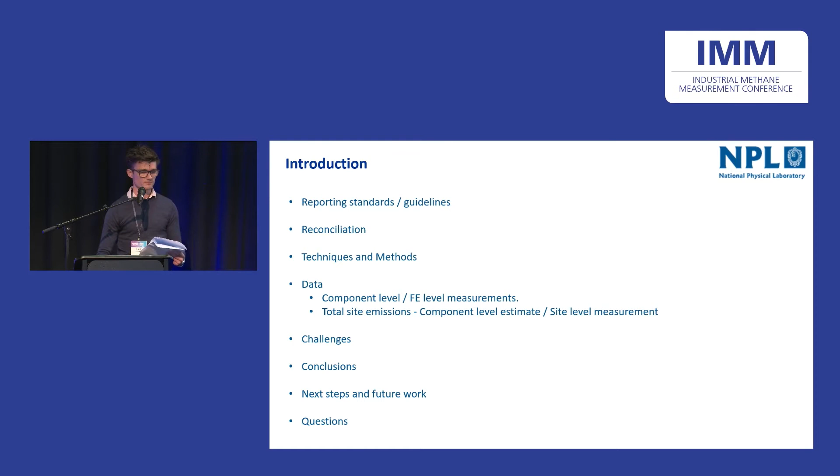So what do we have by way of methane emission reporting guidelines? Broadly speaking, there are two categories: the IPCC's tiers, and OGMP 2's levels. They're not really cross-comparable, but generally as you go up the tiers or levels, the requirements get more stringent, with most companies reporting around level 2 or 3 of the OGMP scale, with the goal being everyone reaching level 5, where actual measurements are required at both the source and site level.

So reconciliation: we're trying to take one data set and make it consistent with another, specifically for OGMP level 5. We're trying to reconcile estimates of site emissions made with source level measurements against site level quantification. The aim here is to provide confidence in these estimates by validating them against total site level quantification measurements.

A couple of important things to note: this type of reconciliation is a check of data at the time, not necessarily of the annualized emissions. So we take a snapshot quantification measurement at the site level, and check that data against what the estimate would be at that time, not the annualized emissions. Also, these measurements should be made independently of each other - we shouldn't have reliance on component level estimates for the site level and vice versa.

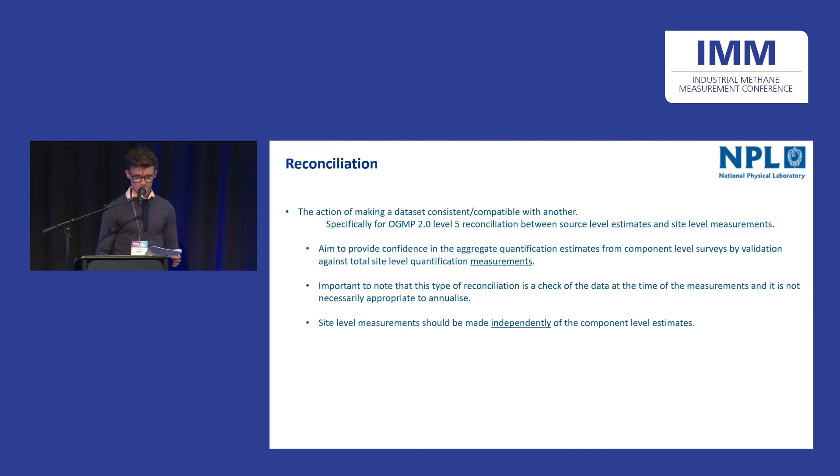So let's take a step back and talk about techniques and methods. Here I think it's important to go into how we make measurements, the features of a measurement. We've got sensors - the most fundamental part of a measurement, something that responds in the presence of a target. Many sensors are available.

The next level down, we've got the technique. This is the application of the sensor into an instrument, maybe combined with other things like optics or other sensors, more than one sensor. Again, many techniques are available: optical gas imaging, LiDAR, sniffing - some examples. They may employ the same sensors, or they may be different.

And then we move on to the deployment media, so the mode by which this is put into the field. It could be fixed on a pole, could be on a vehicle, could be a drone. And then the combination of all these features is the methodology.

And the methodology then also includes how we make the measurement. So a protocol, other measurements that are needed. For example, if you need some wind measurements to get a flux, any quality control procedures that are in place, all of these things are the methodology.

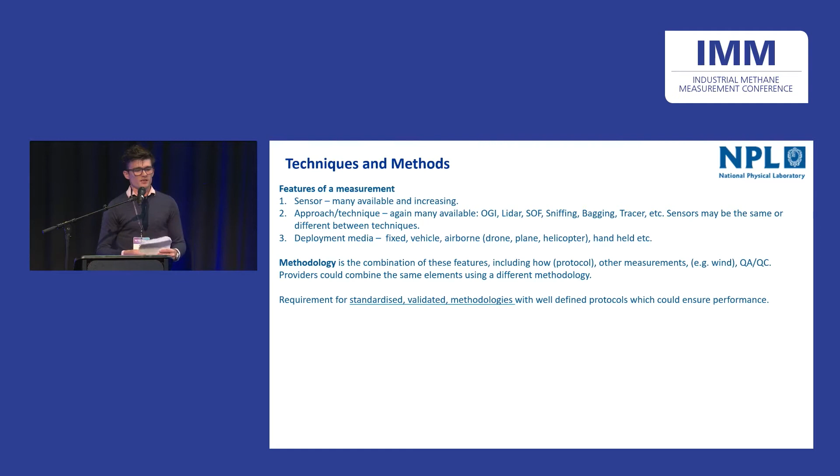And so you could have the same sensor approach and deployment media, but done in a different way, and we've got a different methodology. And so there's a requirement for these methodologies to be standardized, so that everyone's doing them in the same way and to ensure performance, and then to be validated.

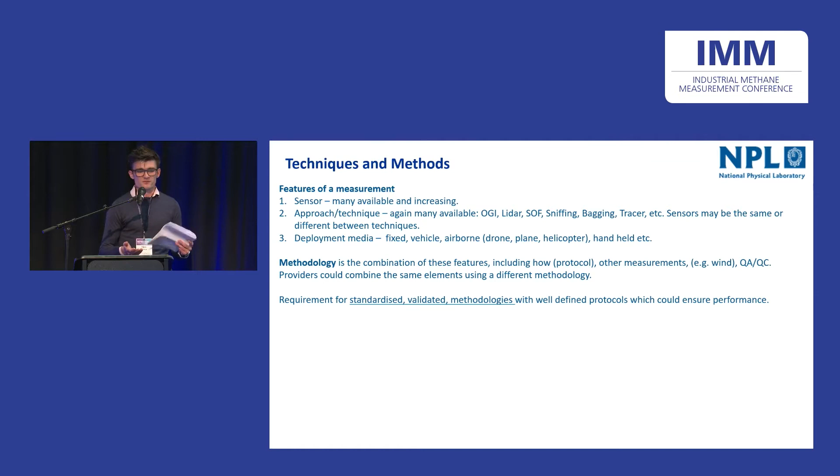To be proven to give accurate results. And this is where it's important to say that it's the methodology that is validated, not any one of these features of the measurement. So we're not validating the sensor, or the technique, we're validating the whole method, including how and other things that go into that.

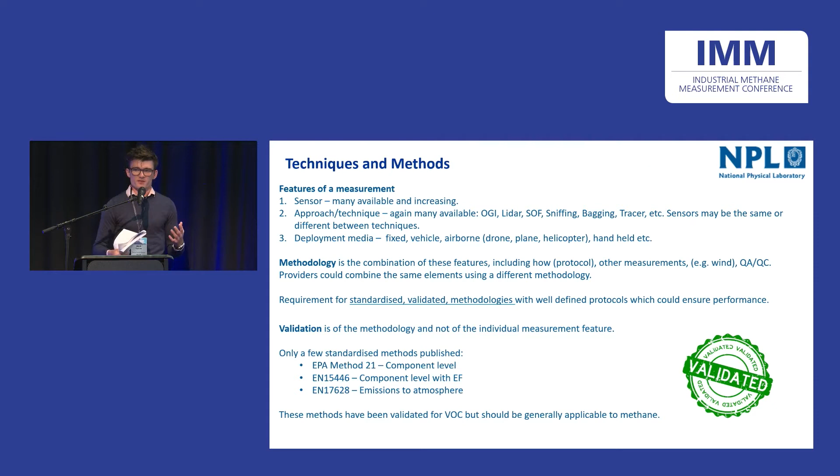And we don't have a lot of published standardized methods available to us. We have Method 21, US standard for component level detection, but it doesn't include any quantification in that method. EN 15446, again a similar detection level method with some emission factors included to estimate quantification, and a recently published standard, EN 17628, which is a validated method for total emissions to atmosphere.

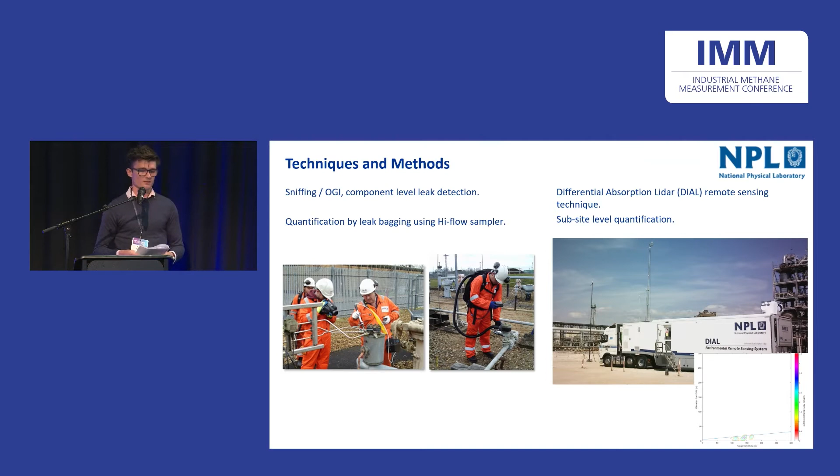This is a thing NPL has its own method for, but no independently validated method is available for that technique. And then on the right hand side, we've got our differential absorption LiDAR, a remote sensing site level technique for quantifying total emissions to atmosphere.

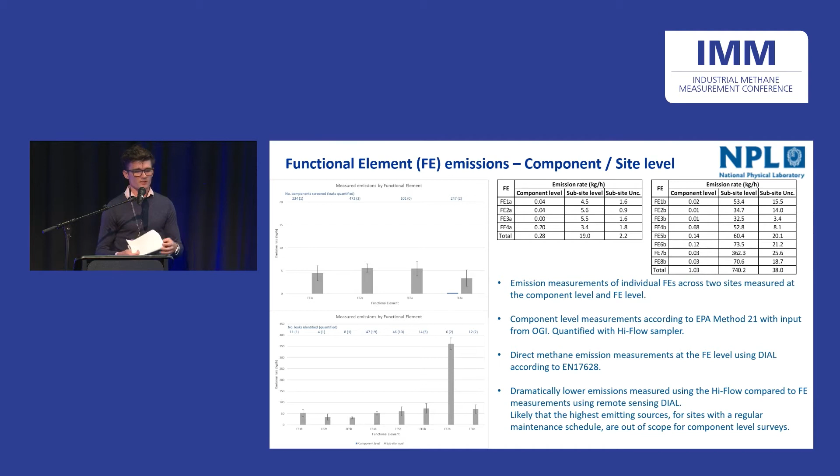So these two plots show some data that we've collected across 2 sites, and these are measurements at the functional element level scale. So that could be a compressor, a vaporizer, those kind of things, or something on a unit on a site.

We're looking at, in the grey, quantified emissions using a remote sensing DIAL technique. And then in blue, which admittedly for the most part you can't see, is quantified emissions of the same, the aggregate quantified emissions for the same functional elements made at the component level using high flow. And we can see that there's dramatically lower emissions measured using the high flow.

This could likely mean the highest emitting sources are out of scope for these component level surveys, which raises challenges when we're trying to reconcile these two data sets. And this could be a good thing. This could be because leak detection and repair programs are working, so we find the leaks, we repair them, and what's left are these emissions that are out of scope.

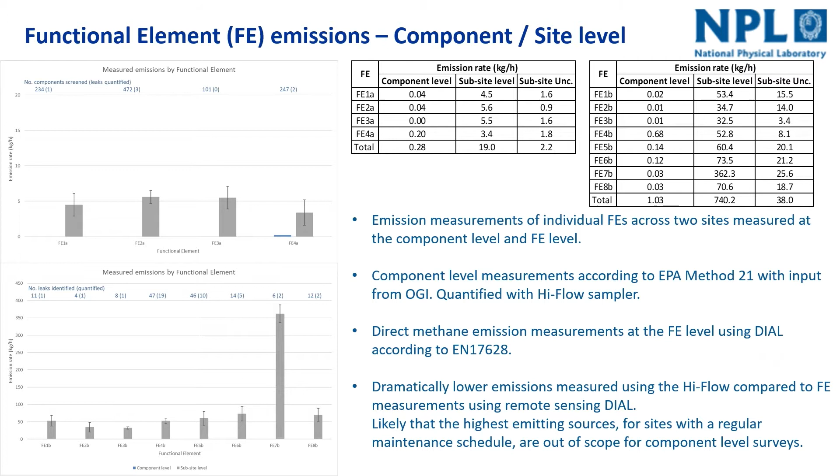And again, we can see a discrepancy between what we're estimating and what we're measuring. Some would say that we've got similar emissions from 2 different component level campaigns about 5 years apart. This could be because maybe the leaks reappear after so many years, maybe they're not permanent, or maybe because if a subsample of leaks is statistically relevant, then we see the same sort of emission profile.

A couple of other things we can point out from this sort of data. The fact that we've got some granularity in the data, we can see that we may be able to direct our approach for detection and quantification surveys differently. So instead of just surveying everything and repairing, we can focus our repair surveys where we know there's high quantification.

The other thing to point out is the potential issue of what we call non-continuous sources, so something that varies considerably with time, duration, or magnitude. And if your site level technique can't distinguish these, we may be skewing the data. So we've got two totals here, one excluding these non-continuous sources and one including them.

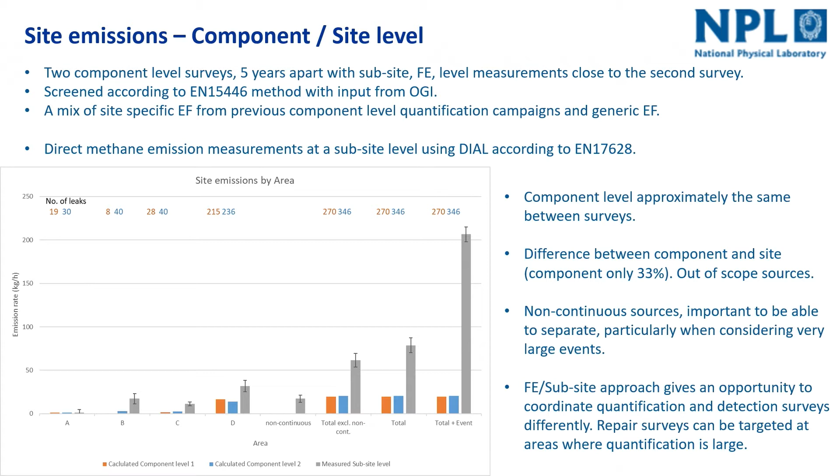And we can see that if a site level technique has included them but doesn't know about it, we could be sort of not comparing the right systems. And the final column at the end, at this point in time, we saw there was a large emission on site, very large but relatively short-lived. But if a single site measurement technique had included that in its site level measurement, we're sort of dramatically skewing our data. And so this is a challenge when it comes to reconciling these two data sets.

So what are some of the challenges? We talked about maybe potentially having incomplete data. So our component level survey may not be capturing the majority of sites emissions, at least in magnitude. And this could be because they're potentially out of scope for those surveys. And we may not be using the most appropriate emission factors. So if we're just using general emission factors from literature, they might not be the most appropriate to apply in these cases. So the more specific we can get emission factors, maybe this gap will close.

And so this issue of non-continuous sources, methods may or may not be able to detect them and separate them. So this complicates our attempts for this reconciliation and for annualizing snapshot measurements, and has the effect of potentially skewing the data. And this is where we need sort of close cooperation between site operators and measurement providers to understand what's happening on site, where there are these types of emissions happening, and how their measurement will take that into account. Is it affected? How is it affected by these types of measurement?

And then I want to touch on uncertainty. This is something that's potentially often overlooked when we talk about measurement, but it is really important. And if we don't know the uncertainty of both data sets, we can never really know how successful we've been in our reconciliation attempts. So this is a really important thing. And this is where standardized and validated methods will help. If we have a standardized way, everyone's doing it the same way, then the uncertainty will sort of almost fall into place, I think.

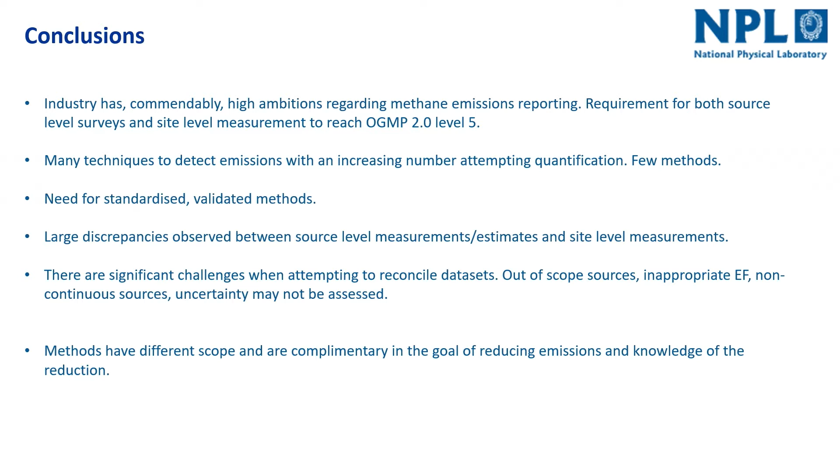We looked at some data and showed that there's sort of these large discrepancies observed between the source level measurements and site level measurements, and also the estimates that are based on some of these measurements and the site level measurements again. And there are significant challenges to overcome when we're trying to reconcile these data sets. So that could be because of sources that are out of scope for some methods, maybe not using the most appropriate emission factors.

This issue of non-continuous sources, so how are we going to take these into account? Do we need to have methods that can separate them, or maybe, as long as we know about them, maybe that's enough? And then this assessment of the uncertainty, really important that we have uncertainty on both sides, both data sets. And I just wanted to touch on this idea that the methods may be validated for a particular scope, and they may not have the same scope, but they're complementary. So detection and then quantification methods are complementary in our goal, which is ultimately to reduce emissions and to know how much we reduce them by.

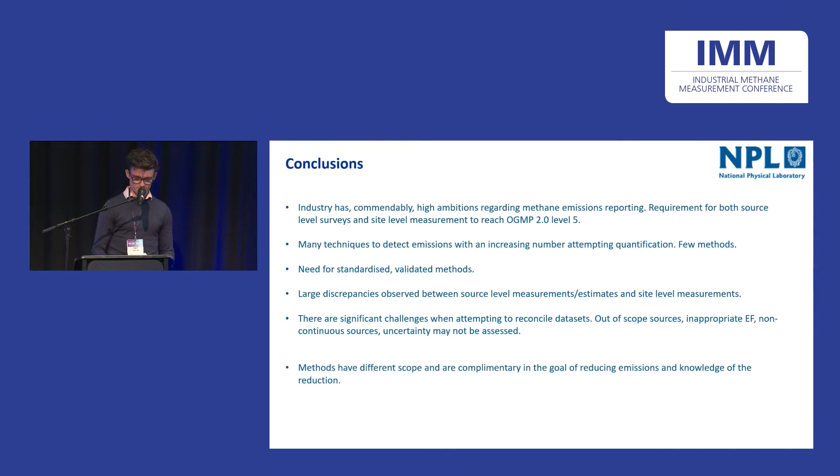So what are some of the things that NPL will be working on in the future, focusing on this reconciliation, and to understand some of the challenges and try to overcome them, including reconciling data from more and different techniques. Developing new methods and validating these methods for high-frequency measurements and long-term monitoring, as just some of them. And then developing these standardized methods, so performance standards, and then methods to validate other techniques, so like a method to validate validation, I guess. And then going on to this taxonomy, so we need to know what we want from our measurement, what we're capable of achieving, and where the gaps are, and hope that then we can try and fill some of those gaps, but we need to know what they are first.

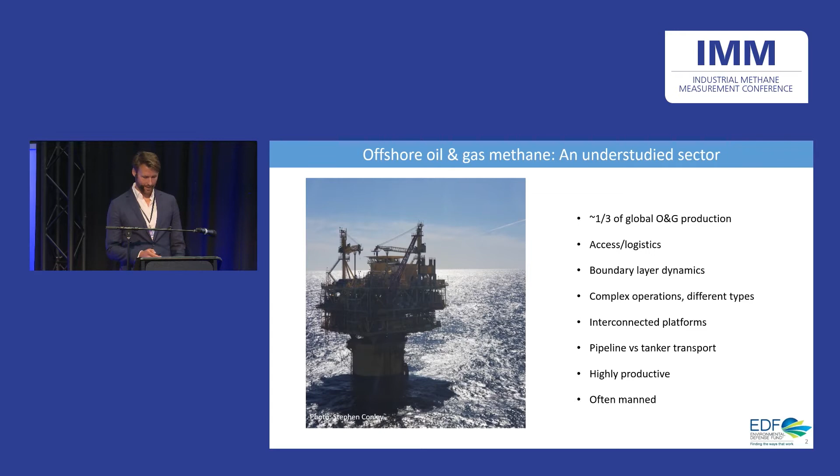I would like to start giving some context by highlighting this study by Amy Foulds, which was just published last year, and which was able to really empirically verify reported emissions offshore. What was very special here is that it was the first study that was really comprehensive and did repeat measurements in an offshore environment, and it demonstrated how much temporal variability there is offshore.

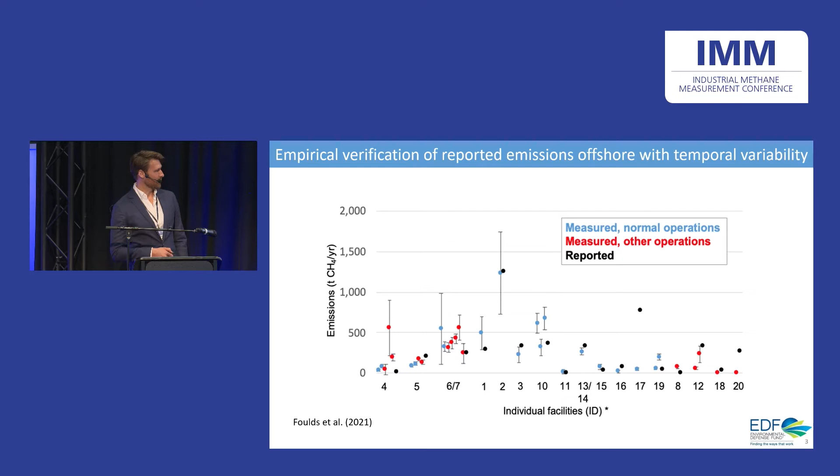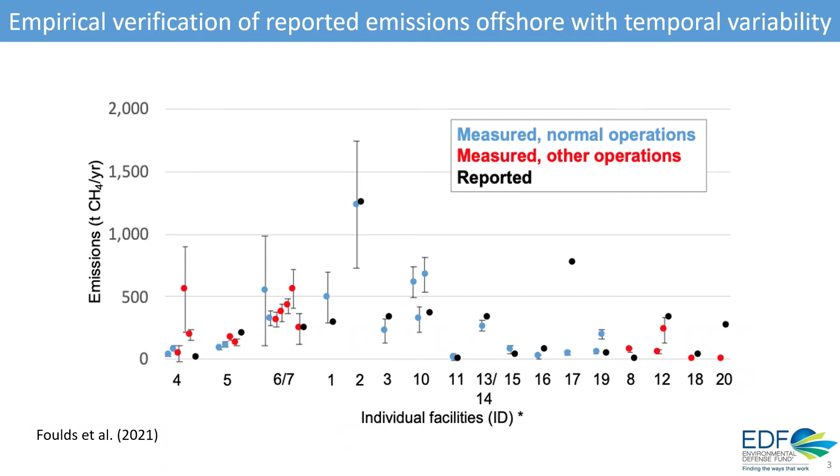You see this with the different sites that were measured here. At each site, the measured values could be dramatically different from one time to another, and those were most likely related to the operating conditions. We'll get back to this topic in a minute. That study was all about quantifying emissions at a regional level, giving a big picture of what happens representatively in one region.

What this study is about is to help establish the science for more accurate company reporting, and that company reporting happens at the facility level. One framework that was mentioned here already is the Oil and Gas Methane Partnership 2.0, on which companies report that produce about half of global oil and gas. And direct measurements are needed to achieve the gold standard at the source and site level.

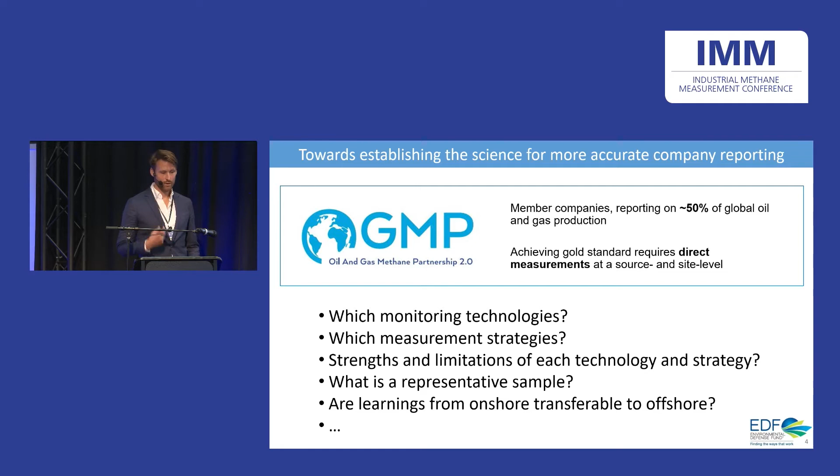In order to do those kinds of measurements, the operators need to ask themselves several questions, including which monitoring technology to use, which measurement strategies, what are the strengths and limitations of each technology and strategy, what is a representative sample, and is there anything from the learnings over the past decade onshore that is transferable to offshore?

To address some of these, we did this joint R&D project, which included the oil and gas industry, represented here by Neptune Energy, which operated this facility called Cygnus Alpha in the North Sea, monitoring tech providers, and an NGO, which happened to be EDF.

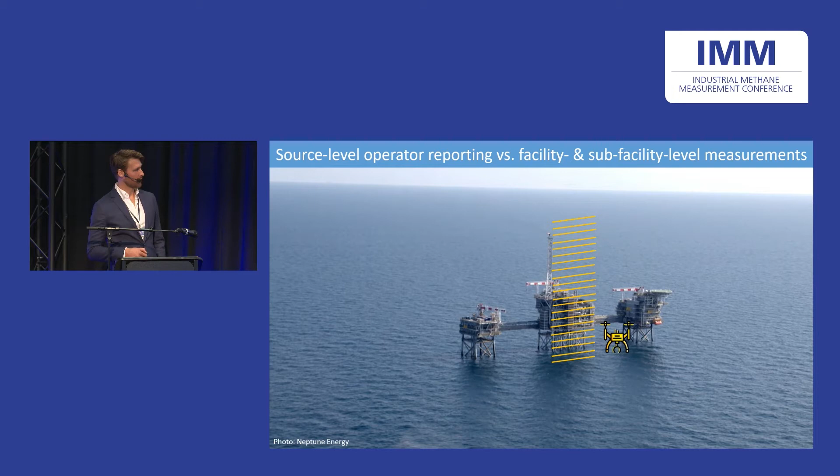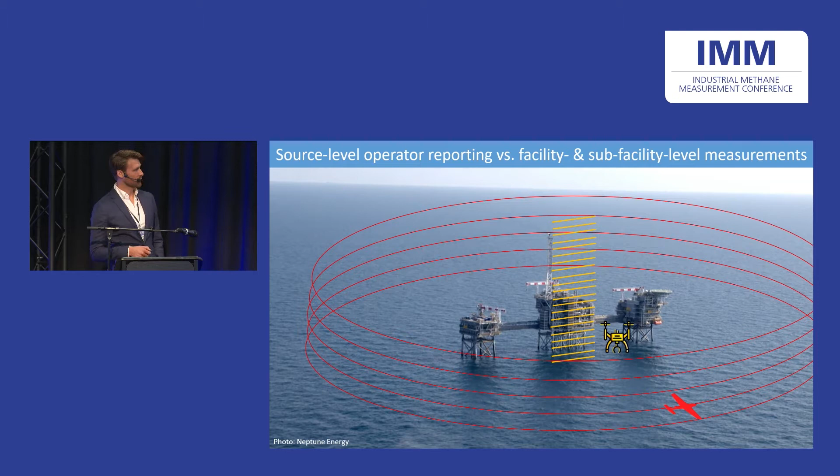In this study, we really wanted to compare source-level operator reporting with measurements at the facility and sub-facility level. For the sub-facility, we did rotor drone measurements, which I'll explain a bit more, but we basically did a lot of downwind transects stacked on top of each other for different parts of the facility. And we also did fixed-wing drone measurements, which would circle the facility at different levels.

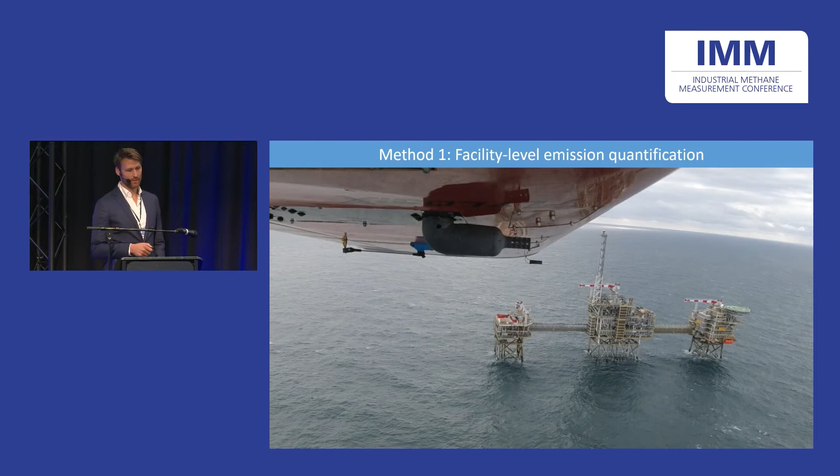In method 1, the facility-level emissions quantification, there's a photo from underneath the wing of the FlyLogix SeaCops fixed-wing drone, circling this facility. And it would do so at very tight intervals, actually, of about 5 meters vertically.

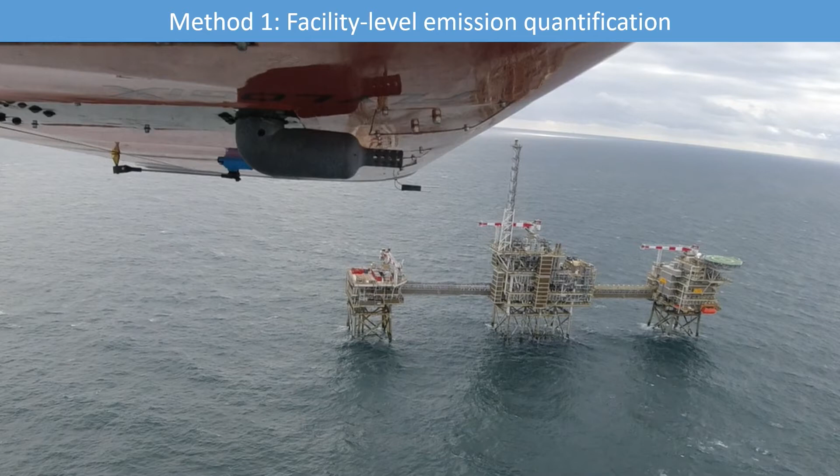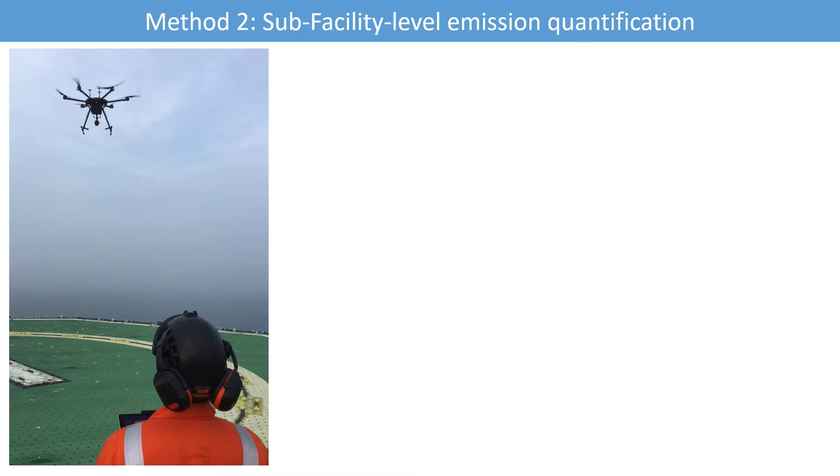This is the drone. And then in method 2, which would do the sub-facility level emissions quantification, this was operated actually from over here, from the heli deck. This is what you see on this picture, where the drone was just starting. And then it would fly downwind of the facility. In this case, the wind was coming here from the south towards the north.

Then we also had an infrared camera looking at, in this case, combustion sources, which come up simply as a warm source, where we could actually see some of the combustion sources and make sure that the drone is actually in the plume, just really for directing it. And the upper part is for a compressor, and the lower example is for a flare.

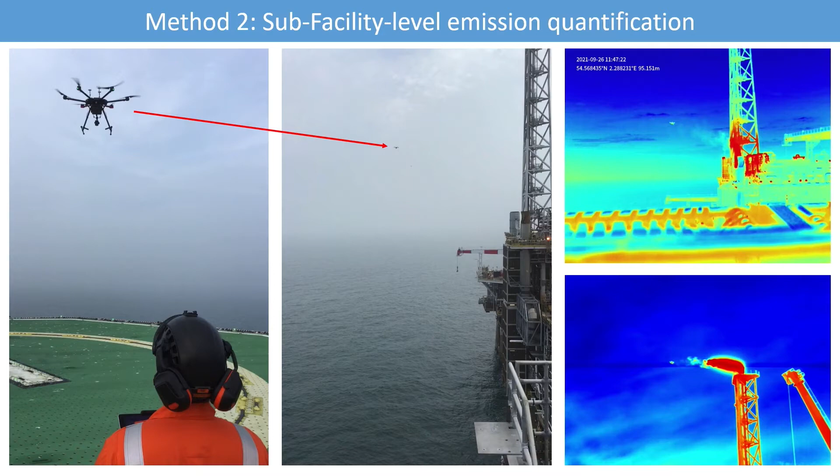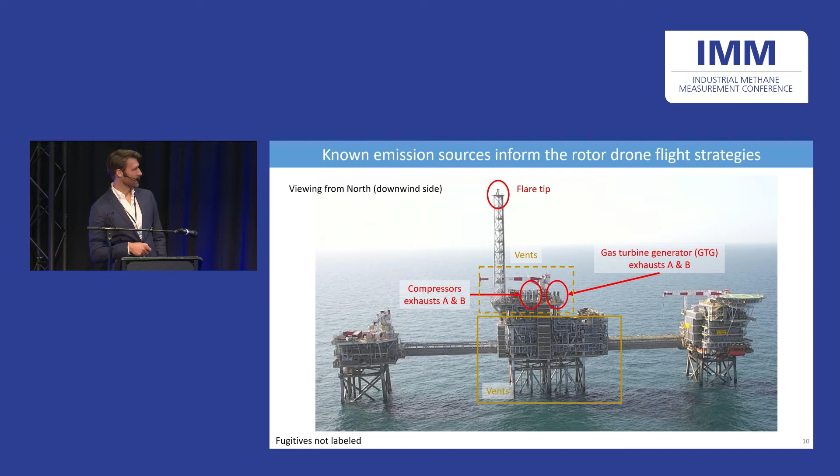And so the known emission sources from this facility really informed the flight strategies of the rotor drone. And so this included, for example, knowing where the compressors are, gas turbine generator, so different types of exhausts. We knew where the vents were, there were vents here, a flare tip over here, and then fugitives obviously could occur everywhere. This here was the wellhead, this was the production platform, and this is the accommodation platform.

And so the first flights of the rotor drone were really downwind transects of the whole facility. We noticed pretty quickly that doesn't work so well because you have about 10 to 15 minutes of drone flight, and this is about 100 meters or so from one end to the other, and so you really don't do a lot of transects. And then for the other flights, we broke it up to the different jackets. In this jacket, we even did individual parts in there.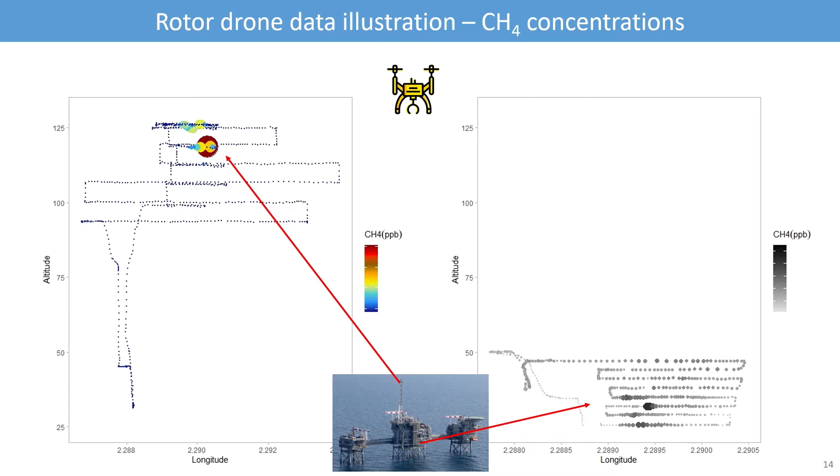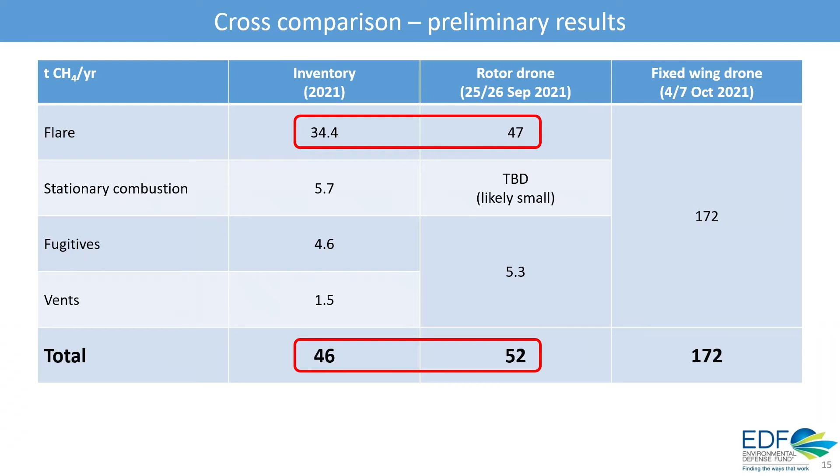Okay, and now we're getting to some preliminary results where we did this cross-comparison. There's a lot of stuff on here, but I want to put your attention to a few things. So the first interesting insight was that the flare, so we're comparing the inventory with the rotor drone and the fixed-wing drone. We saw that in the inventory, the flare was the biggest emission source, which we could confirm with the rotor drone.

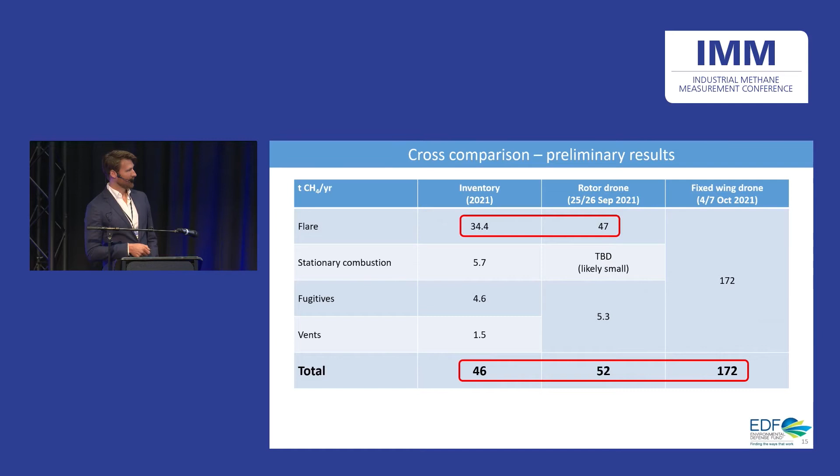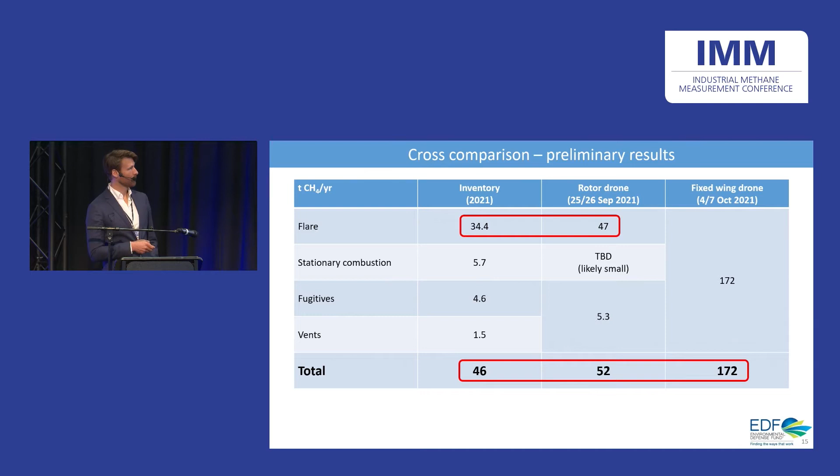Then another insight was that it was quite puzzling that the top-down results from the two drones didn't quite match up. There was a factor of 3 or more between them. And then the other important thing to realize is that those drone flights happened on different days. And so now for this reconciliation, we need to ask ourselves what was happening here. Was there real temporal variability, as we saw in this Norway example, between flights on 2 different days here and 2 different days here? Or was the rotor drone estimate low biased, or was the fixed-wing drone high biased?

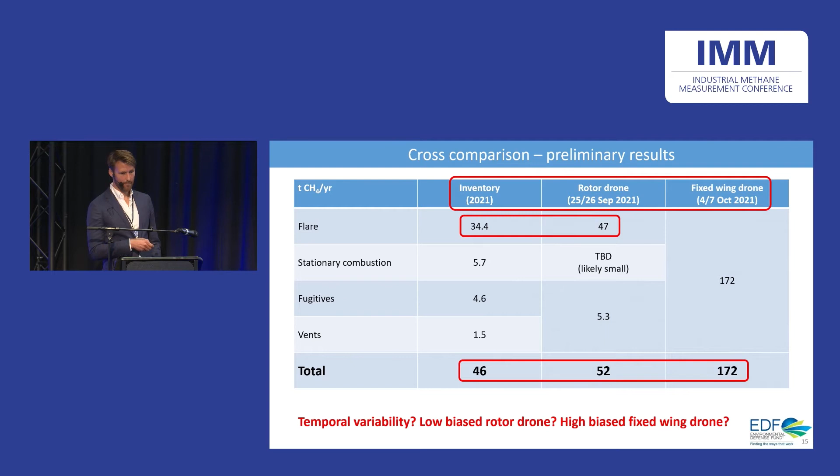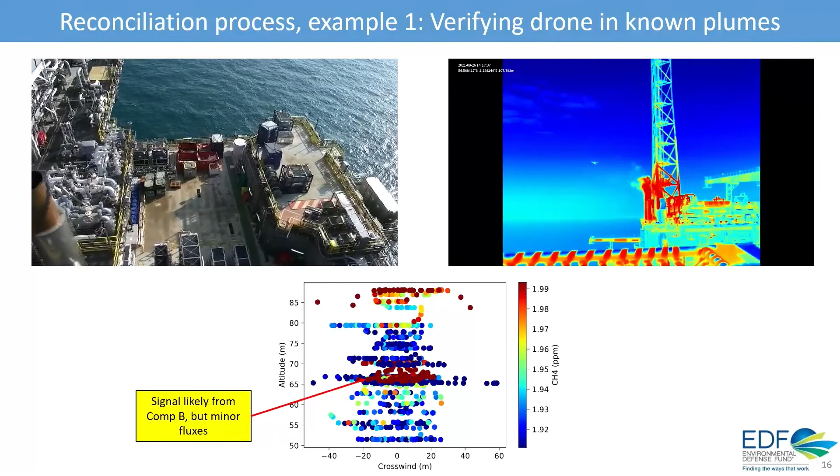Okay, my thumb is going numb. Okay, here we have it.

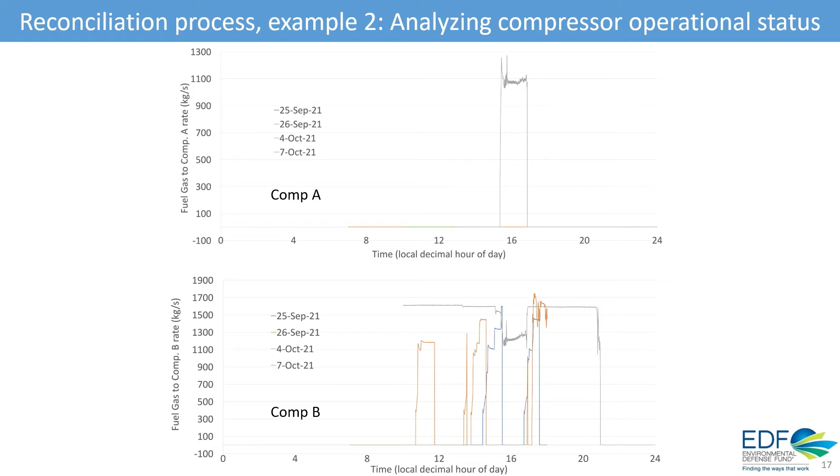So some preliminary conclusions from this work. In terms of logistics, we demonstrated that offshore on-site methane measurements are possible, also via external contractors. So this is really important to do these routinely in the future, to do the company reporting. There is a trade-off between measurement detail, which the rotor drone delivers, and the ease of application, which comes with a fixed-wing drone.

In terms of scientific and reporting insights, the reconciliation through OGMP requires both source level and site level information and measurements. The different empirical methods not only help acquire that, but they're also quite complementary, as you could see, having different levels of detail.

But it also means as soon as you apply different methods, you will see how robust your results are. With just one method, you might be happy with the result. You get another one, and you will see where the full range of estimates really lies.

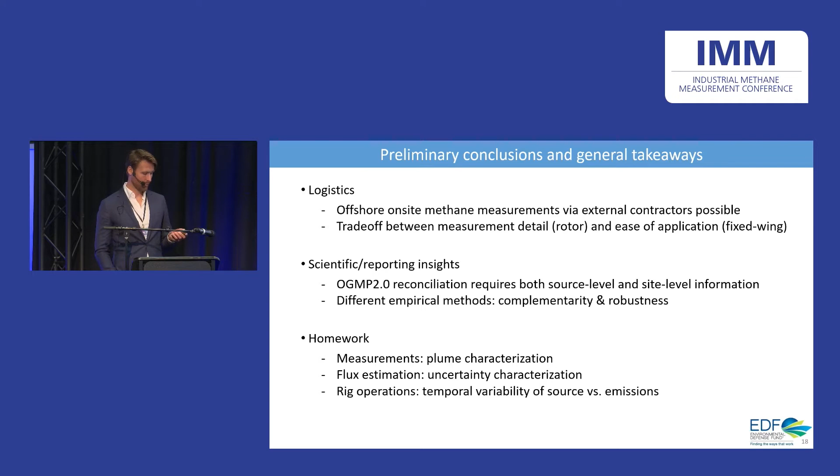In terms of the homework we still have to do: look more into plume characterization, different frequencies and densities of measurements used with the different drones, flux estimation, and look more at uncertainty characterization for the specific conditions during the flights. And as I just mentioned, how much of the observed variability in emissions could be due to variability in rig operations.

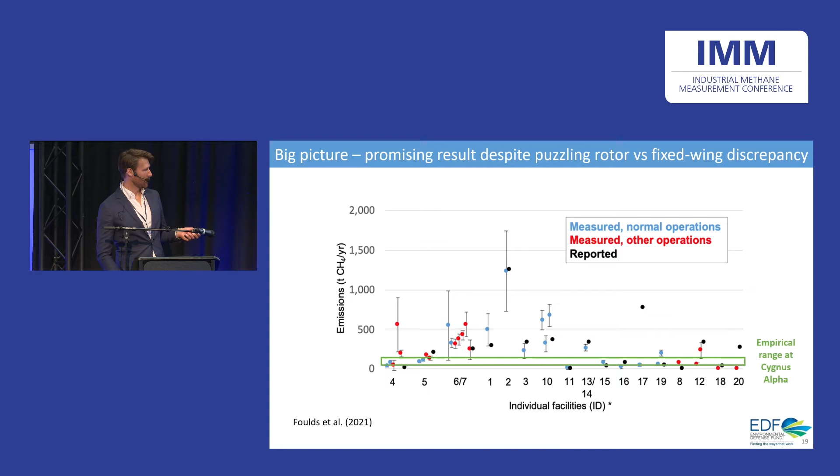In the big scheme of things, I think this was still a promising result, because even though we have this puzzling discrepancy between the rotor and fixed wing, we were already able for this specific facility to say the range is probably somewhere in here, in green. What we know from other measurements is that the range of emission levels at the facility level could be much larger. So we're pretty sure that this facility is not anywhere up here. It's also not zero. It's somewhere in here. And this is where the empirical data helps already, knowing much more than just from an inventory.

So thank you for your attention, and happy to answer questions later.

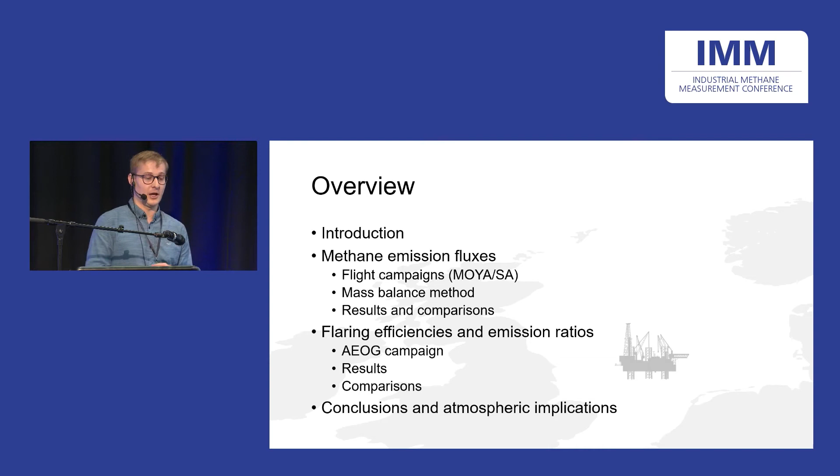I'll start off with a very quick introduction to the oil and gas sector and methane emissions. I'm then going to talk in maybe a bit more detail than Stefan did about Amy's paper that was recently published in Atmospheric Chemistry and Physics, so that will be the bulk of this talk. I'll talk you through the flight campaigns, the data that Amy used, and then come on to the mass balance method, which Anka very nicely introduced earlier for us as well, and then show some results and comparisons that Amy drew from that. The second part of this presentation will be on more recent work, which uses data from another flight campaign in the North Sea, where we're looking at flaring efficiencies and some emission ratios. And that's all very preliminary.

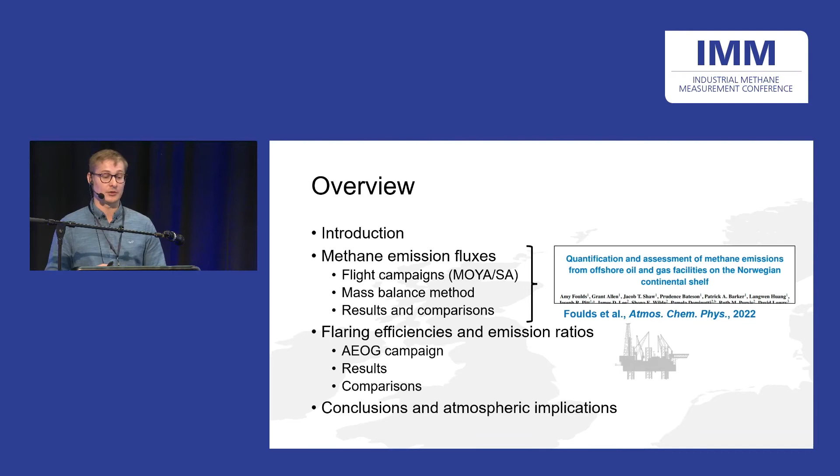So by way of a brief introduction, globally, methane emissions from the oil and gas sector are responsible for about 80 teragrams of methane a year. If you sum up all of the man-made methane sources, it comes out to roughly a fifth for the oil and gas sector. And if you sum up all methane sources, including natural methane as well, then the oil and gas sector is responsible for about a tenth of all methane. Emissions from the oil and gas sector primarily come from three main areas: intentional venting, leakage, and of course flaring as well.

So for offshore oil and gas, there have been very few studies done. I've got a slightly different number to Stefan. I'm not sure why, even though about 20% of production is done offshore, although Stefan said a third - but that just makes my point even more. And very few studies have also been done on flaring emissions, even onshore.

There have been some recent studies of offshore emissions, done in a couple of production regions - the Gulf of Mexico is one, and then also the North Sea. So just to summarize a few of the recent conclusions from that.

Stuart Riddick led a shipborne campaign measuring emissions from, I think, about 8 facilities. His methane flux was about 7 grams of methane per second.

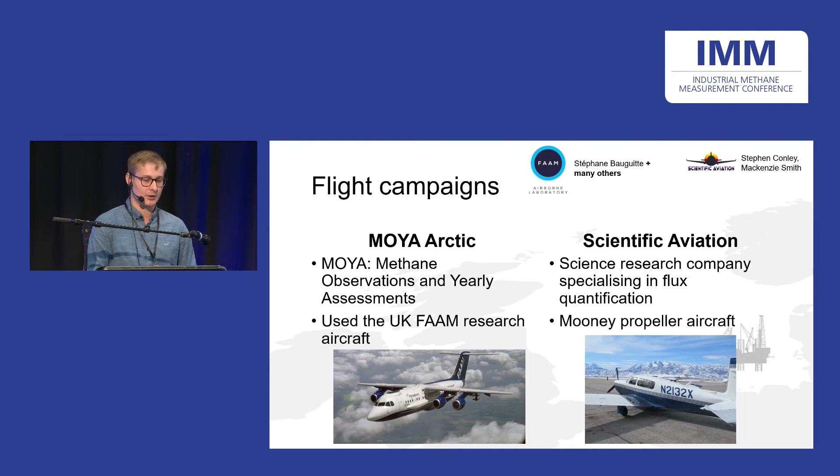In terms of what these aircraft are capable of measuring, the FAAM aircraft can do quite a lot. You've got a lot of room for instruments. Methane itself was measured with an LGR fast greenhouse gas analyzer, which was initially operating at 1 hertz, but was upgraded in 2019 to operate at 10 hertz.

Moya Arctic involved 3 flights in 2019. The Scientific Aviation campaign is obviously using a smaller plane - it can measure various trace gases. Methane in this case was measured with a Picarro analyzer, and they did 10 flights, slightly later in the year, but a similar sort of time frame.

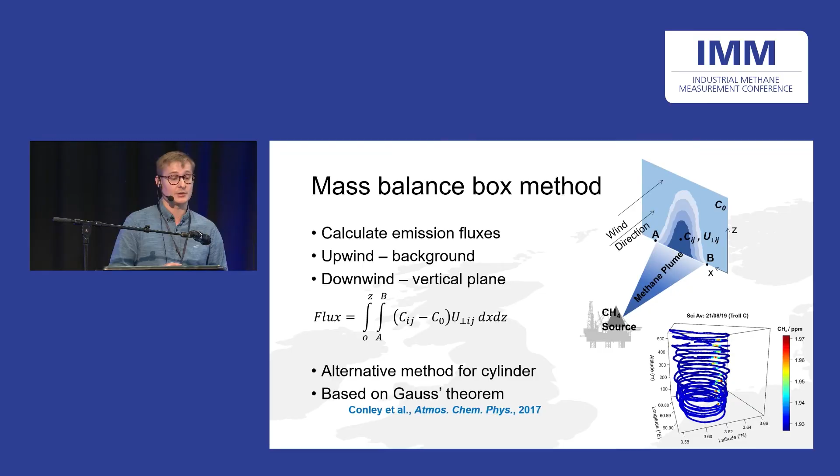So both campaigns used the same method to quantify the emission fluxes. I used the mass balance box method, which Anka did talk about earlier. That basically involves an upwind flight leg to ascertain the background methane mole fraction, and then building up a vertical plane downwind of your methane source and integrating over that to calculate an emission.

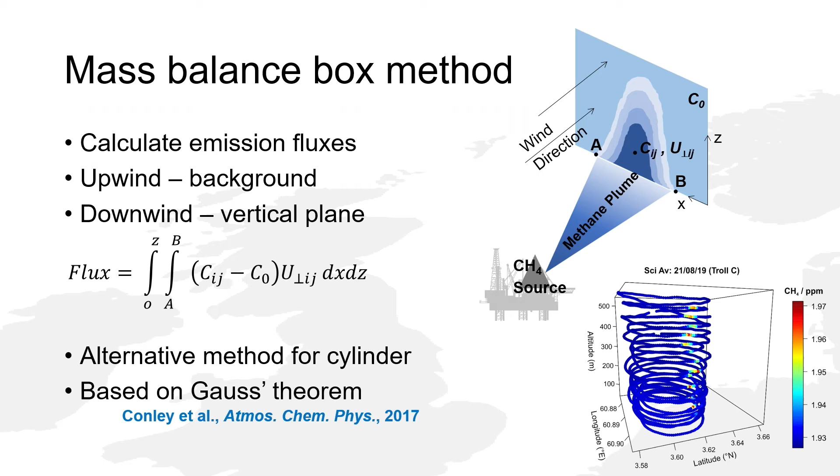What the Scientific Aviation guys do is a slightly different variation of this, where they use the volume of a cylinder rather than a box. That's based on Gauss's theorem, and you can read more about that in Steve Conley's paper.

The emissions that Amy calculated range between about 0.1 gram to 40 grams of methane per second, with a mean of about 7 grams of methane per second, which actually agrees really quite closely with Stuart Riddick's results.

If you want to scale that up to annual numbers for comparison to operator reports or inventories, I think that's about 2 to 1,200 tons per year, with a mean of about 200 tons.

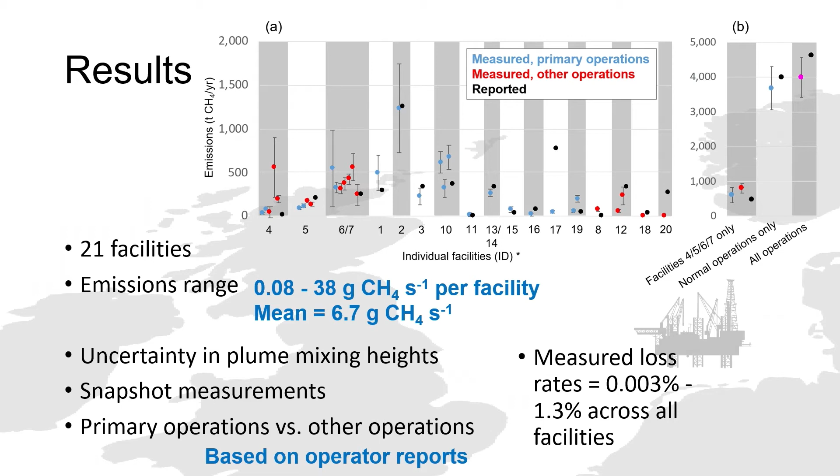As various other people have mentioned in talks, these are snapshot measurements, so when you do scale up to an annual estimate, you're very dependent on what was going on the rig at that time. So what Amy's tried to do here is break down the emission results based on what operators reported they were doing. She's categorized that as primary and other operations, and you can read more about that in her paper.

What Amy also did was compare with the operator reported emissions, that's shown on the right plot there, and she found very good agreement generally with those. I think they actually turned out to be a little bit higher, 15% higher or something than the measurements.

Amy then also looked at a global inventory, this global fuel exploitation inventory, which was published by Scarpelli et al. But she found much poorer agreement with that, about 50% lower on aggregate. And she attributed this to two primary reasons: one, the inventory was slightly out of date - I think it was for 3 or 4 years before our study; and two, the way in which the inventory was compiled and how the emissions were aggregated over grid cells.

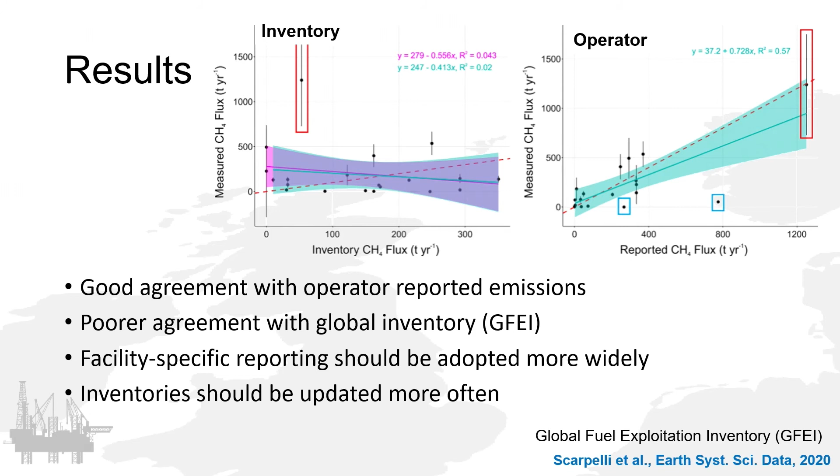Okay, so now on to the second part of this. I realize I've not got a great deal of time left, so I'll try and be quick. Flaring is widely used to dispose of natural gas in cases where it's not used for sale. It involves the combustion of hydrocarbons in the fuel gas to form carbon dioxide, and this results in the emissions of various components such as carbon monoxide, nitrogen oxides, sulfur dioxide, and any components of the unburnt fuel.

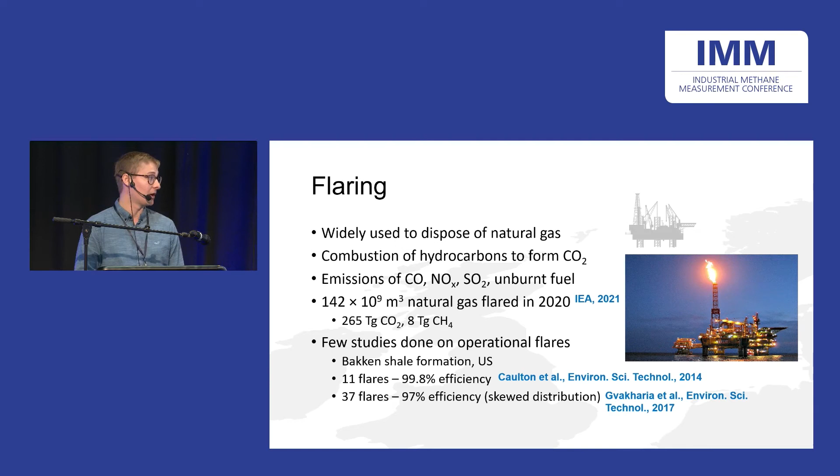The International Energy Agency reported that 142 billion cubic meters of natural gas were flared in 2020. But despite this, there seems to have been very few studies done on emissions from operational flares. There's quite a few from test flares, but they're not always operating under operational conditions. The few that do exist seem to have been done in the Bakken Shale formation in the US. And we should note that emission inventories use an assumption of 98% efficiency, and I guess these studies are quite close to that.

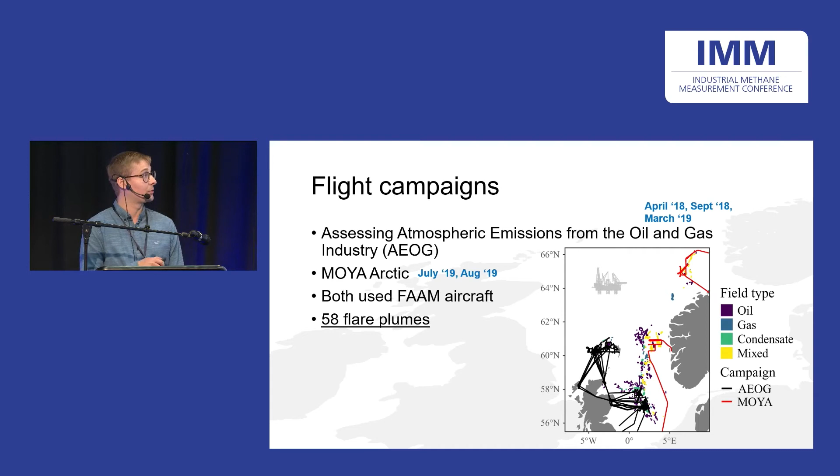So the flight campaign data that we used for this, we used MOYA Arctic, which I've already mentioned, and also the Assessing Atmospheric Emissions from the Oil and Gas industry campaign, AEOG, which flew a little bit earlier in 2018 and a bit of 2019 as well. But both of these use the FAAM aircraft.

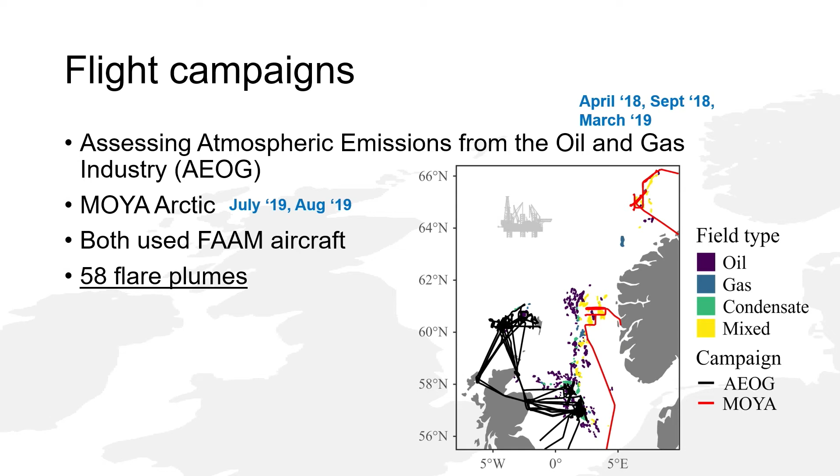Through both of those campaigns, we managed to identify about 58 flare plumes, or 58 plumes that we think are due to flaring. They were found by concurrent emissions in methane, ethane, carbon dioxide, and nitrogen oxides. And this plot just shows some of the flight paths over the North Sea.

One of the measures that you can use for flaring is this combustion efficiency, which is essentially a measure of the carbon in the flare gas versus carbon in the fuel gas. Nara et al. published an equation for doing that, where you essentially look at the enhancement in carbon dioxide against the enhancement in carbon dioxide plus the enhancement of methane. Now, I guess that assumes that the fuel gas is 100% methane, and we know that's probably unlikely to be the case. Since we had continuous measurements of ethane on board the FAAM aircraft, we've modified their equation to include the ethane component as well.

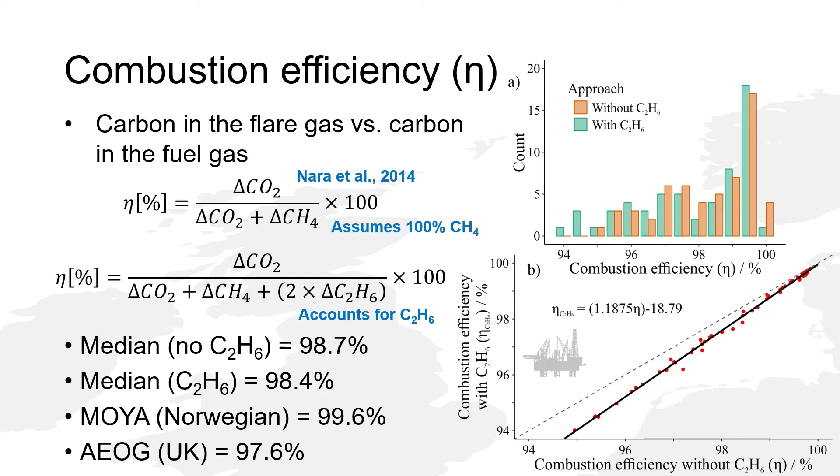This plot over on the right shows a histogram distribution of combustion efficiencies calculated with and without accounting for the ethane, and then we've just got them plotted against each other there with quite a nice linear correlation. I guess currently this is all very preliminary work. The current takeaway here is that the MOYA campaign's combustion efficiencies measured there were quite a bit larger, approaching 100%, when compared with those measured in AEOG. We're currently attributing that to the fact that MOYA flew over the Norwegian sector, whereas AEOG was all in the UK. But I'm open to anyone else who has a different conclusion from that.

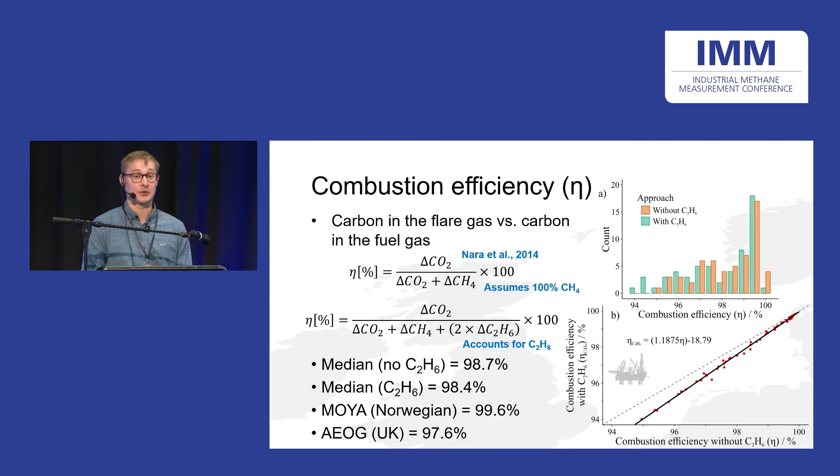Just to quickly conclude, we've measured methane emissions from 21 facilities in the Norwegian sector of the North Sea using the mass balance method. The operator reports appear to be in good agreement, and I guess that's indicating best practice here. The inventory that we looked at, this Scarpelli Global Fuel Exploitation inventory, underestimated emissions, primarily for possibly two reasons: firstly that it's out of date, and secondly the way in which it aggregates emissions. We should stress though that there's always a need for these regular and independent surveys to monitor emissions.

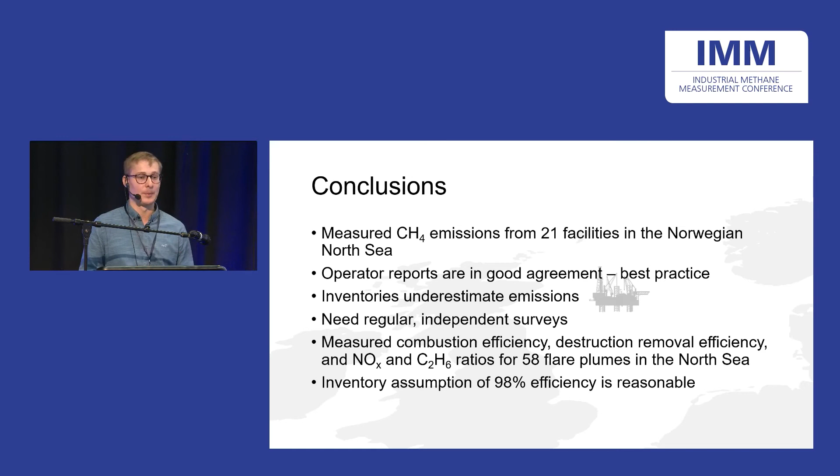I don't have any references slide shown here. I did have a slide of references, but that must have been in a newer version. Yeah, that's all, thank you very much. Happy to take any questions.

Should I just leave this here? Yes, I think so. Oh, okay, yeah. Second time. Okay, so, no. Hello? Is it working now? No, this one is working, yeah? Maybe your settings. Hello? But okay, you were already introduced. Okay, so after a few more adventures...

I will present you the result of a study on site-level quantification of methane emissions. There is no author or co-author indicated on the first page because the list is quite long. It's a very collaborative effort with several of the groups present in this conference today. The role that we had at LSCE was to synthesize and give, let's say, an independent view on the measurements that were provided to us. We participated upstream of the study, and downstream we were on the field, and we tried to have an impartial vision of things here.

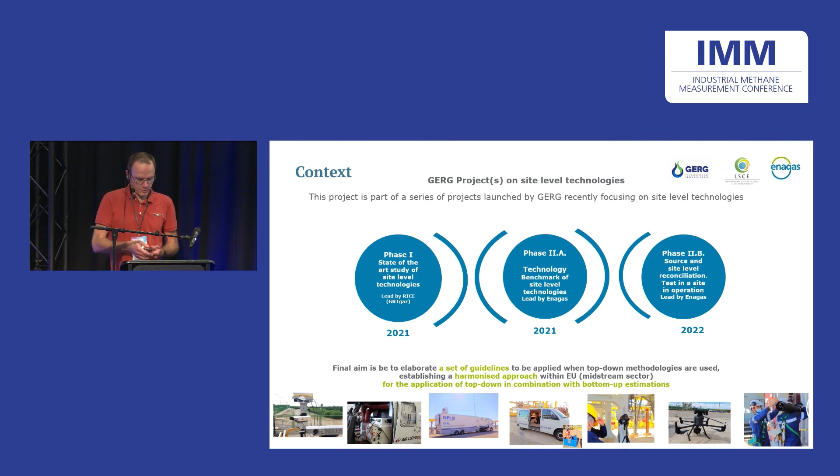The controlled release experiment used a facility located in Spain. It's a former compressor station. It's actually not operating at the moment.

On the site we identified several different release points. All the participants came on the site and made their measurements almost as they wanted. Of course there were many constraints and many interplay between different techniques. So finally, there were 9 site-level technologies and 3 bottom-up techniques, going to release points one by one.

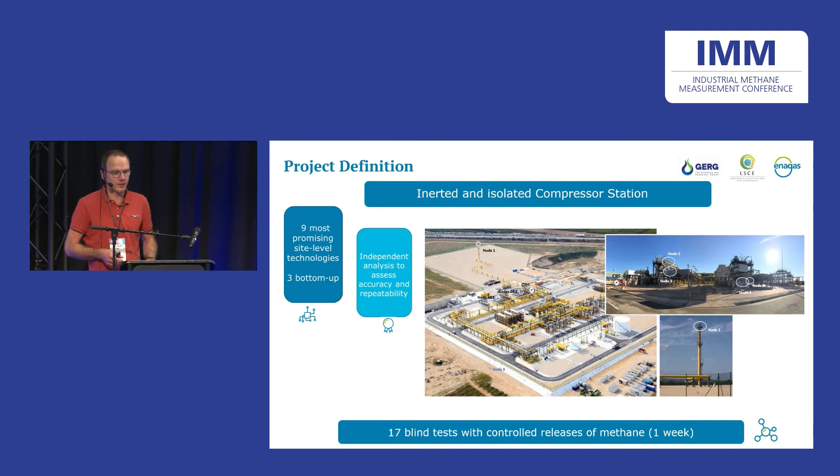Here you see also that several shapes of release nodes were tested to represent potentially different types of emissions, of leaks. One is a 25-meter high vent stack - what we call node 1. And then closer to the ground, you have a few different types of nodes - actually 4 different types: linear, circular, open-ended, etc.

The project was a collaboration between various entities, and the organization was made by Enagas. On the field, it was coordinated by Bureau Veritas, and us at LSCE, we helped with defining the release schedule, and we took the data independently. We were not measuring on the site ourselves.

Okay, I'll put the microphone closer.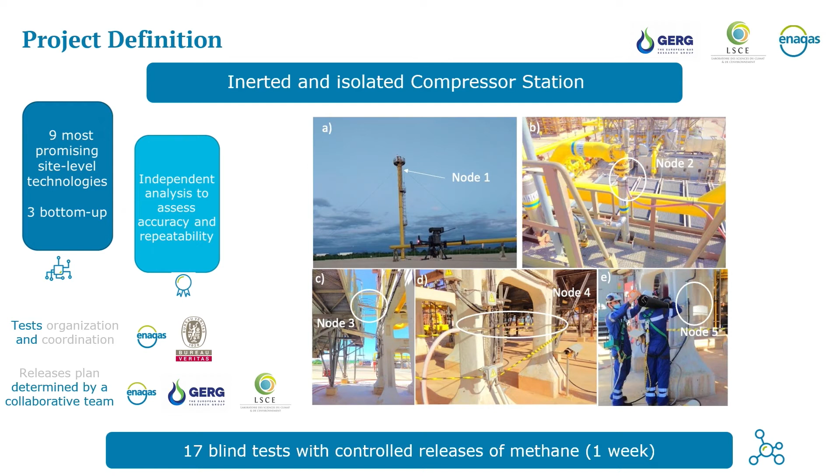You can see a few of the companies, actually all the companies that participated here with their technology. We had a cocktail of different technologies, with in situ measurement from drone.

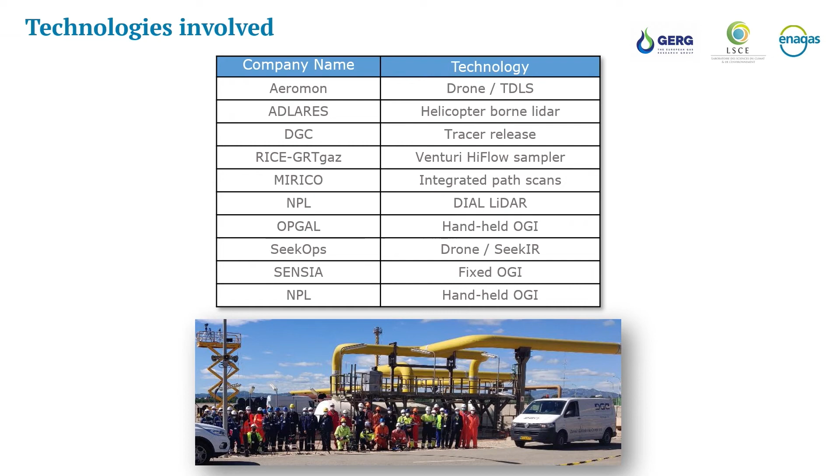We had two different types of lidars measuring methane, one that was helicopter borne, and one that was on a truck by the NPL group.

You had different types of infrared cameras, handheld as well as fixed infrared cameras. You also had integrated path scanners that were targeting reflectors, sending back signal into the system.

All these groups came to the field independently, made their measurements, went back home, and had a fixed deadline by which they should provide their best estimate of the emissions. Then we took that data and compiled it for you.

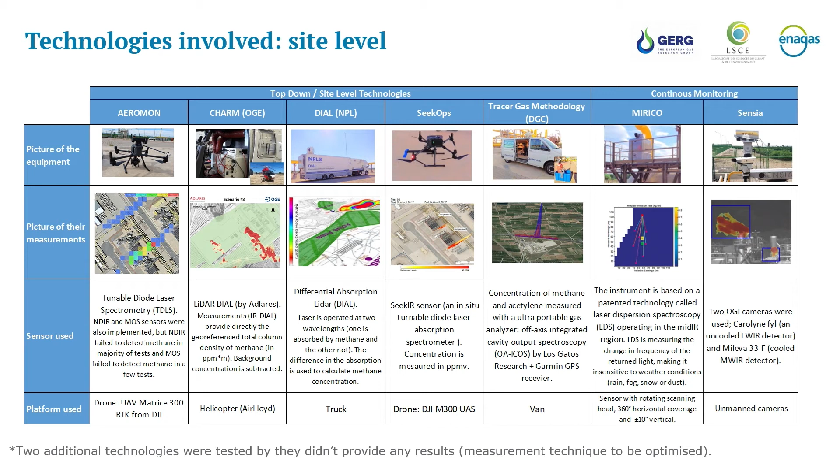Well, actually, I can skip that maybe. It's giving just more information on the individual technique. I'm not sure I can go through this because it's quite small actually.

So the result that we had in the end for the different techniques, we tried to look at the uncertainties that are reported by the groups.

We have different types of uncertainty reporting, and we estimate ourselves the uncertainty associated with NPL, the uncertainties associated to the control release experiment itself. For some releases, we had significant uncertainty due to a mass flow controller that was not perfect.

You can see that there is generally a fairly good agreement between each technique and the truth, let's say, from the release. Many top-down techniques tend to overestimate the emission.

So it's from the top row, and the two on the bottom left here are top-down techniques. Here you have the handheld cameras and the high flow sampler. The handheld camera tends to generally underestimate the emissions.

We have generally a fairly good correlation. So when high releases occur, they're actually estimated to be high, with various performances. What we see is that some techniques have a larger scatter than others.

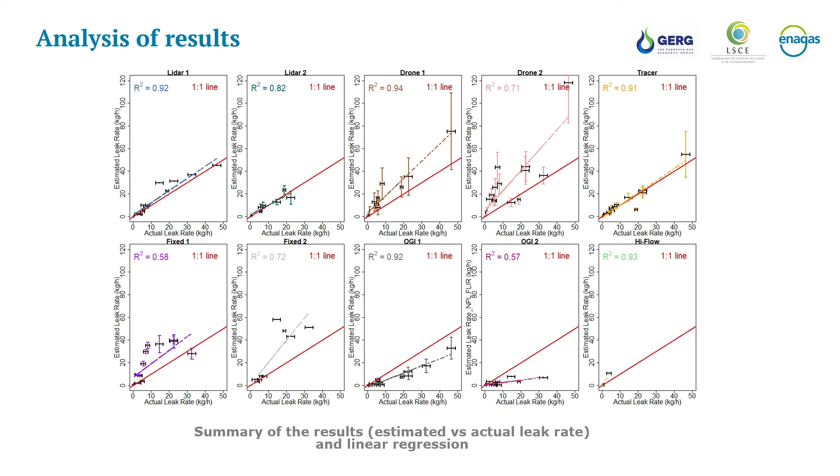The tracer release consists of releasing a known gas at a known rate close to the source. So what we can say already is that these different techniques are not the easiest ones to deploy, but they have quite good results.

We tried to synthesize this result to provide an overview of the different techniques. So here, for each release, on each technique, we take the discrepancy, the difference between the estimation of the rate and the truth.

We calculate the absolute value of the relative error for all the releases for each technique. Ideally, all the techniques that are on the zero line, all the measurements on the zero line, are the best ones. Each dot, on the x-axis you have each technique.

Each dot is one individual release. You can see the intensity, the leak emission rate, depends on the color of the dot. The box and whisker plot for each technology shows the statistical distribution.

It's the median in the middle, and you have the first quartile and the third quartile here. You can see the large spread of some techniques, typically the drone technique, and some of the fixed techniques as well.

You can see also in this figure, because we try to see another trade-off that we think is important, is to what extent each group was able to provide information for a lot of releases. Because some groups may decide that the data is not good enough to provide as a result.

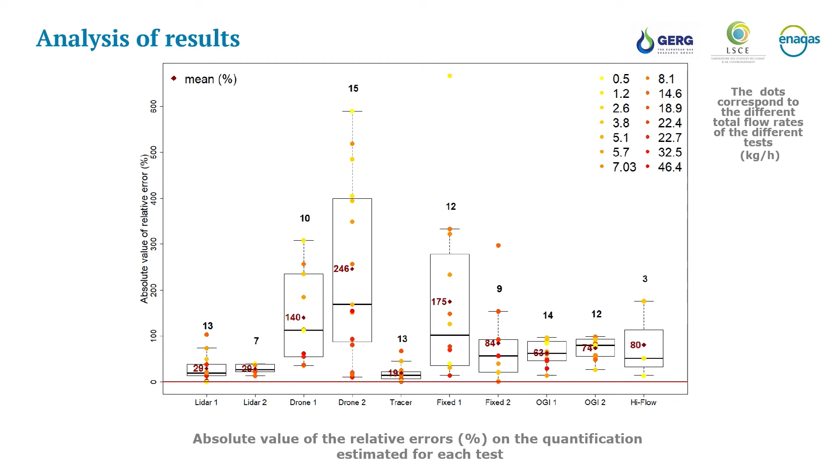So one of the things that we found in the end is that, first of all, the positive thing is that almost everybody is always within one order of magnitude of the truth. So this is what it means here. We try to stick to the metrics of analysis of the paper by Ravikumar et al. in 2019 from the EDF challenge. And then we look at how many times each technique is within a factor 2 of the true value.

And here we have much more difference between the different techniques. You can see that the handheld OGI cameras are typically handicapped by these metrics, because with the underestimation they tend to fall more easily outside of the specified range.

And in the end, we also try to look at how we can compare the uncertainties that we calculate from this study, the typical relative error of the technique, with the uncertainties that were provided by each group. It's the two left columns. Here it's very challenging because there are very different ways to report uncertainty: expanded uncertainty, 1 sigma, 2 sigma. We try to harmonize this, but the work is not complete at the moment.

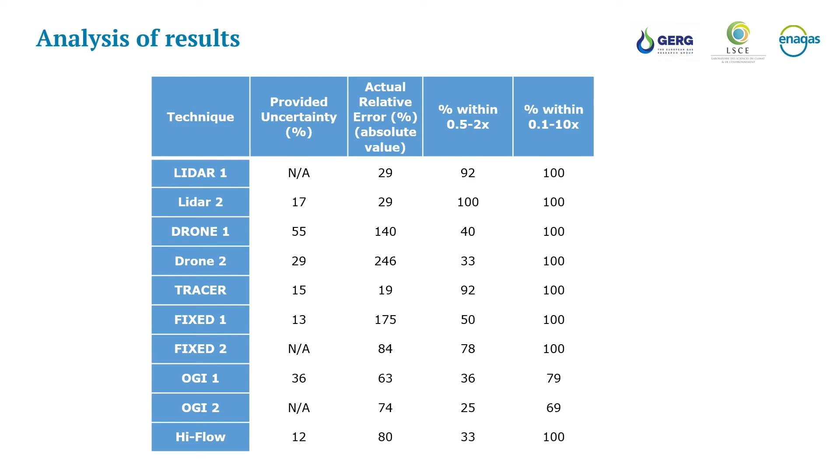Hop. Not working anymore. Okay.

So in conclusion, we had only 3 technologies that showed average error below 50%: the 2 LiDAR techniques and the tracer release. As I noted, these are techniques that require significant effort. The LiDARs need to be moving around, either with a heavy truck or a helicopter. They also need a lot of expertise, of course.

The tracer release requires that you put an acetylene bottle, or not necessarily acetylene, but in this case it was acetylene, next to a pre-identified leak point. It's a complex operation. If the points are too close, it becomes very challenging to quantify the points separately. And then you also need a sensor that is able to measure both methane and acetylene, of course.

We need further work to determine how this technology can be applied to reconcile bottom-up estimates. Here we try to compare these techniques, separating them as top-down or bottom-up, but we didn't go as far as recombining the bottom-up estimates with the top-down values. And with bottom-up techniques tending to underestimate emissions, we already see the challenge coming at the very fine grain in our study.

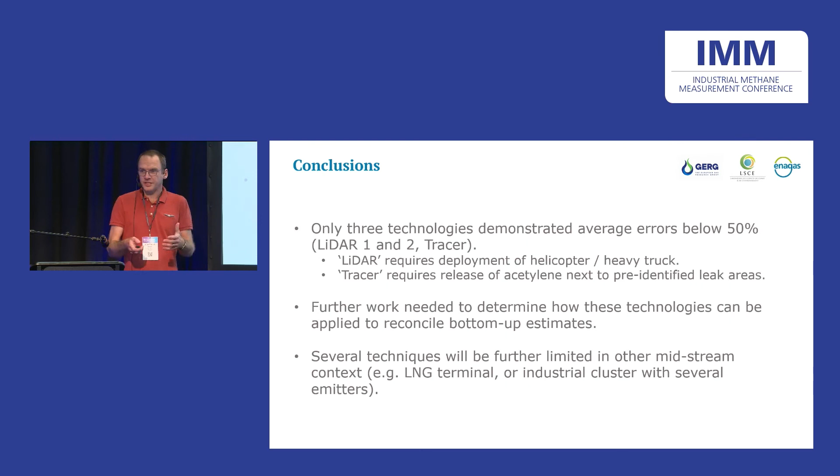We also wonder how these techniques will behave in a complex environment, like an LNG terminal or an industrial cluster with many different emitters. There we were in a perfect setting, close to the sea in Spain, with almost nothing in the area. It was countryside, no other strong methane emissions. So it was quite easy to manage. We have not investigated the influence of other emissions nearby.

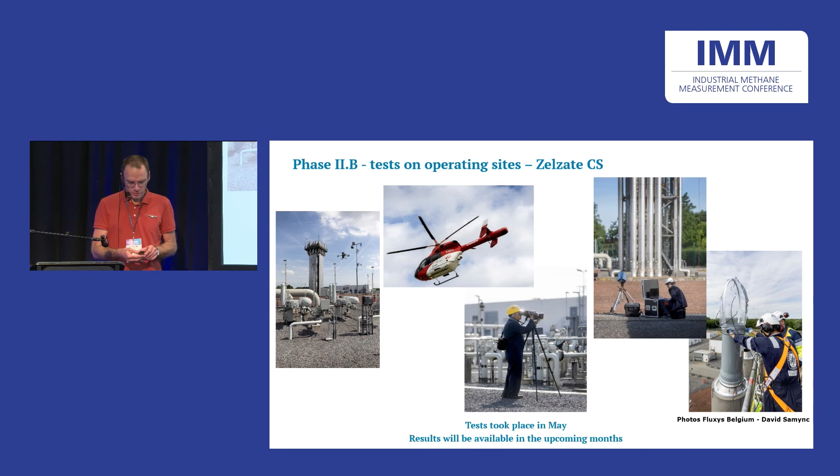There has been a follow-up study, a measurement in Zelzate on a site in operation. In this case, you don't have the truth, but you are in a real environment with the real constraints of operations. The analysis is work in progress. And I think I finish here.